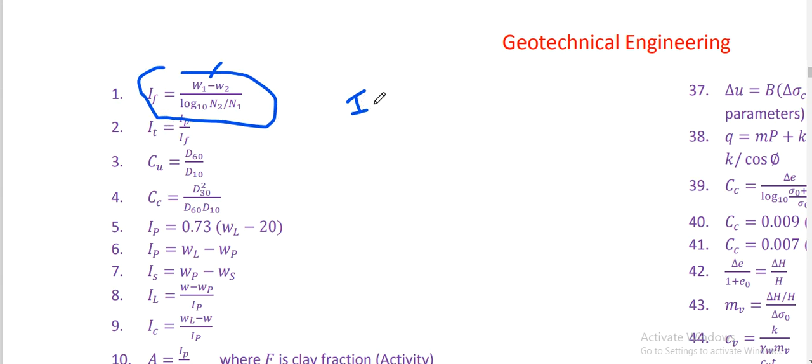Secondly, the toughness index formula IT is IP by IF, where IP is plasticity index and IF is flow index. So toughness index is basically the ratio of plasticity index divided by flow index.

Then what is the coefficient of uniformity? It is D60 by D10. D60 is the size of the sieve where 60% of particles pass through that particular size, and D10 is similarly defined.

Similarly, coefficient of curvature is D30 squared by D60 into D10. So this is formula number 4.

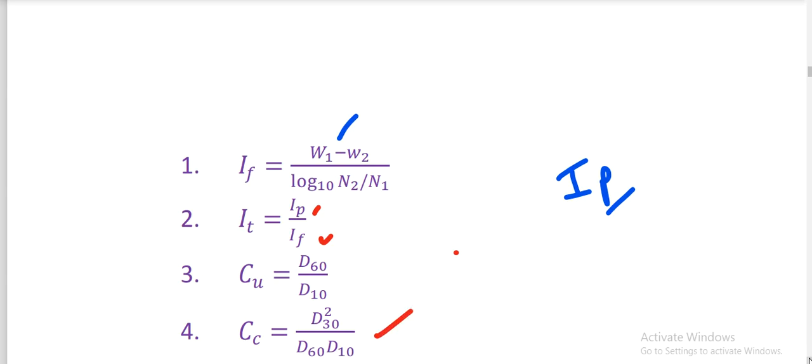Then we'll discuss formula number 5, the plasticity index IP. If you determine it, it is 0.73 times WL minus 20.

Formula number 6: plasticity index is also defined as liquid limit minus plastic limit. Also, shrinkage index is basically plastic limit minus shrinkage limit.

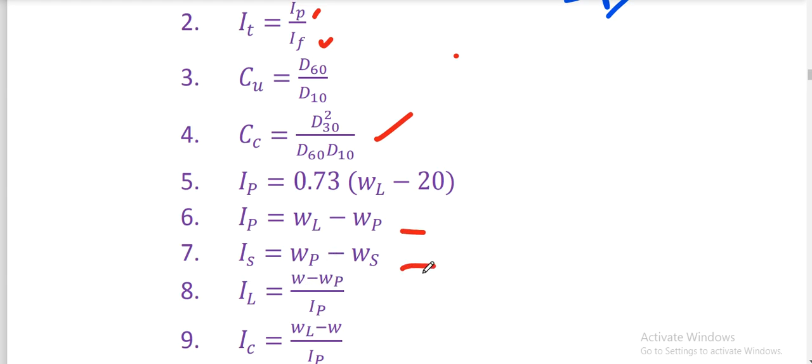Then formula number 8: liquidity index IL is basically W minus WP (plastic limit), divided by IP. This is a formula to determine liquidity index.

Then consistency index IC is WL minus W, divided by IP. Then what is activity? Activity is IP by F, where F is the clay fraction.

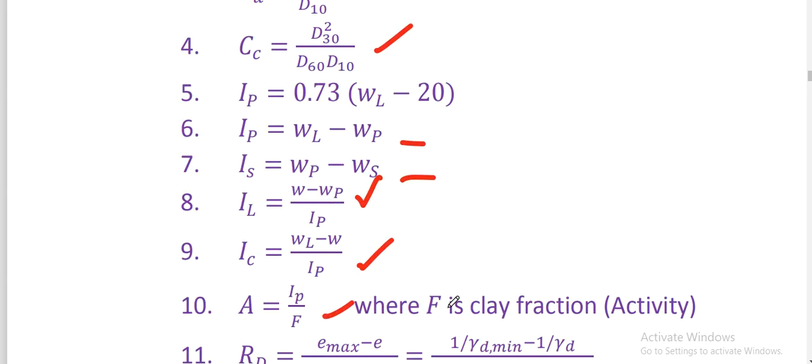What is clay fraction? Clay fraction is particles passing 2 micron size. That means if our particle size is smaller than 2 microns, we consider it as clay fraction.

Then we have relative density. Relative density formula is E maximum minus E, divided by E maximum minus E minimum. From there we can write it as 1 by gamma D minimum, minus 1 by gamma D, divided by 1 by gamma D minimum minus 1 by gamma D maximum, where gamma D is basically the dry density.

Gamma D min is the dry density at the loosest state, and gamma D max is the dry density at the densest state.

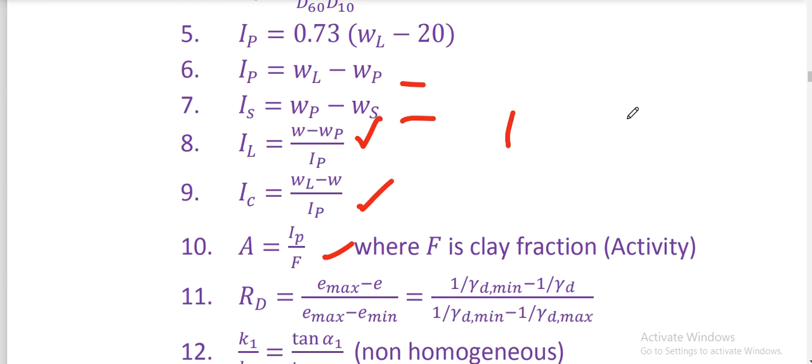Then we have coefficient of permeability formula, formula number 12. That is K1 by K2, where K1 is the coefficient of permeability of the first soil, K2 is coefficient of permeability of the second soil, equal to tan alpha1 divided by tan alpha2, where alpha1 and alpha2 are the angles.

Suppose we have two soil layers, so the first has permeability K1 and the second soil has permeability K2. If you draw the angles, this angle is basically alpha.

Then another formula for coefficient of permeability is based on void ratio. Coefficient of permeability varies with the square of D (particle size) and with porosity, roughly as E cube or E square — you can say K is proportional to E square. So permeability is proportional to the square of the void ratio. These types of questions are framed from this Allen-Hazen equation.

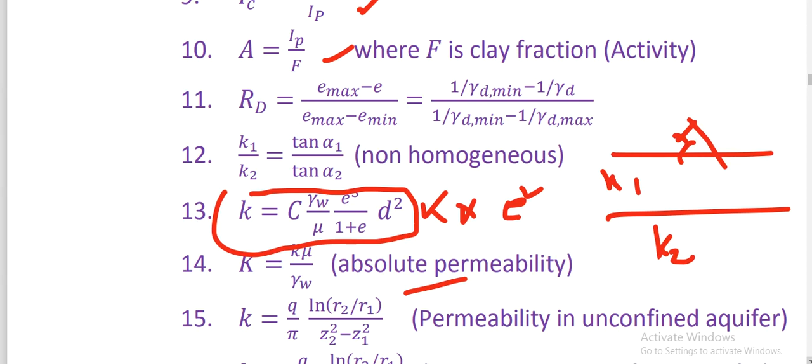Then we have K is equal to K mu by gamma W, that is absolute permeability. Then for unconfined aquifer, the permeability value is determined by Q by pi ln R2 by R1, Z2 square minus Z1 square.

Then for permeability in a confined aquifer, K is equal to Q by 2 pi B ln R2 by R1, Z2 minus Z1. Then if we need to find horizontal permeability KH, that is equivalent horizontal permeability, it is K1 into H1 plus K2 into H2 by H1 plus H2.

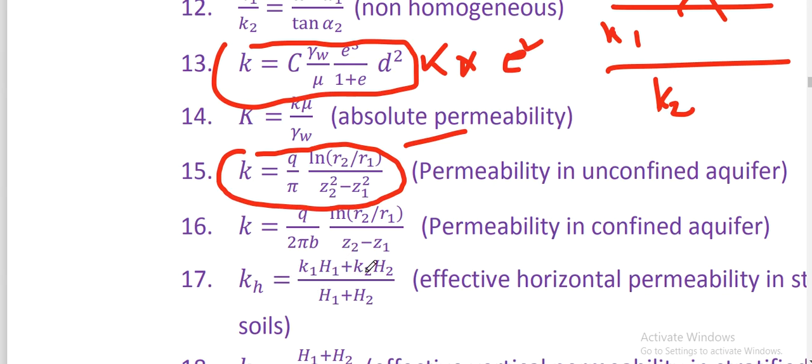Next we have the formula for KV. KV is basically the effective vertical permeability for a stratified soil. If vertical permeability is to be found, then it is H1 plus H2 divided by H1 by K1 plus H2 by K2.

Sometimes you may be asked to find the effective permeability, where KH and KV are given. Suppose KH value is given as 6 and KV value is also given as 6, then root over of 36, K equivalent is also 6. So such type of questions may arise.

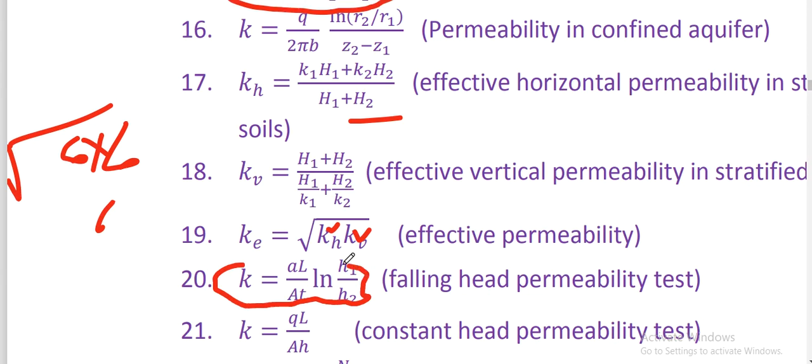Then for falling head permeability, how do we find permeability? K is equal to AL by AT ln H1 by H2. Then formula number 21 for constant head permeability is Q L by A H.

What is the seepage discharge formula? Q is equal to K H NF by ND.

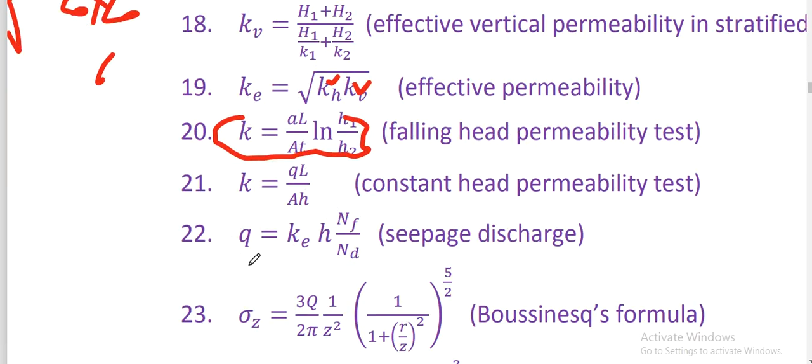What is Boussinesq's formula for determining the vertical stress at a point Z? 3Q by 2 pi Z square, 1 plus R by Z square, to the power 5 by 2.

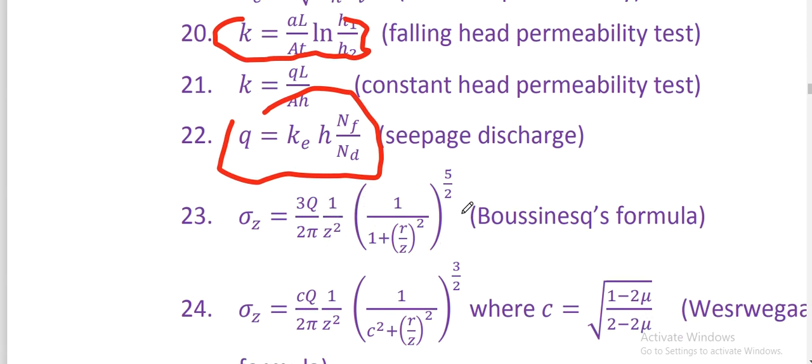Then we have Westergaard's equation for finding sigma Z value: CQ by 2 pi Z square, C square plus R by Z whole square, to the power 3 by 2. Then for line load we have 2Q by pi Z, 1 plus X by Z square, whole square.

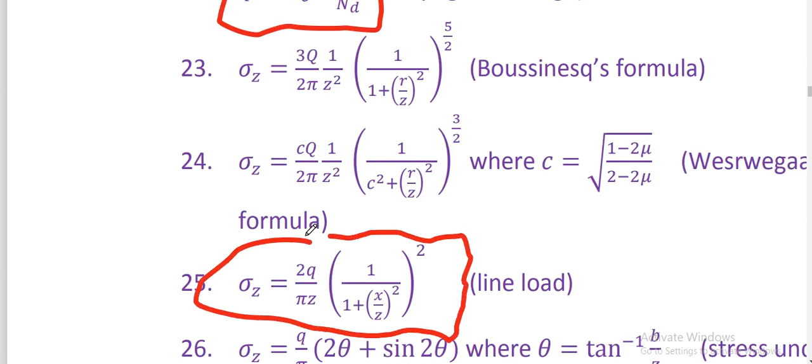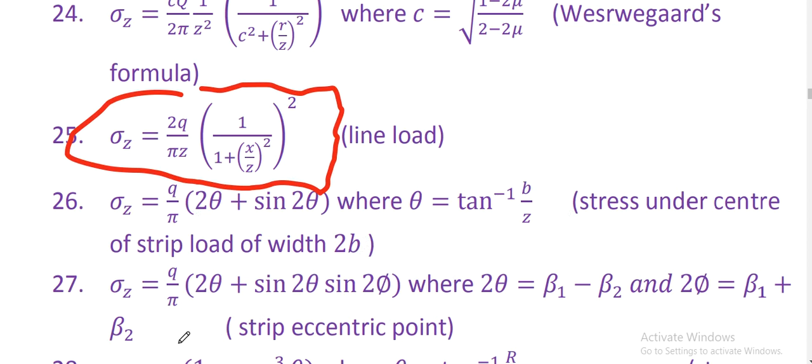Then we have formula number 26, for stress under the center of a strip load. For strip load, sigma z is equal to q by pi into 2 theta plus sin 2 theta, where theta is tan inverse b by z. Sigma z is equal to q by pi into 2 theta plus sin 2 theta sin 2 phi, where 2 theta is beta 1 minus beta 2, and 2 phi is beta 1 plus beta 2, for strip eccentric point load.

Okay, then we can determine the circular load stress, vertical stress at point z: Q into 1 minus cos cube theta, where theta is tan inverse r by z.

Sin phi can be written as sigma 1 minus sigma 3 divided by sigma 1 plus sigma 3, for cohesionless soil. For cohesive soil, sin phi is sigma 1 minus sigma 3 by 2, by c cot phi plus sigma 1 plus sigma 3, divided by 2.

Then we have the major stress sigma 1 equals 2c tan alpha plus sigma 3 tan square alpha, where the failure plane or failure angle is 45 plus phi by 2. Tan phi is tau by sigma for shear box test.

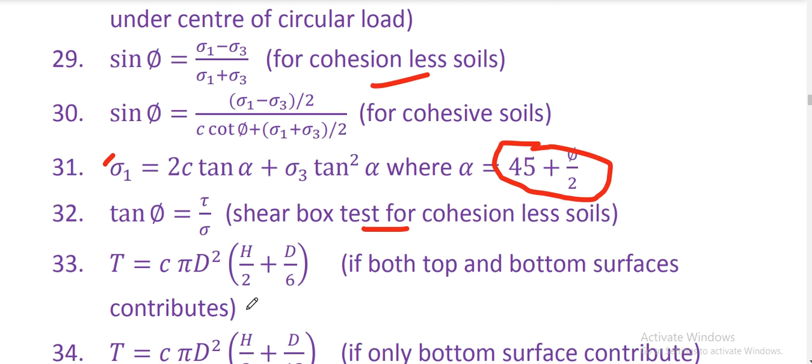And then another formula for shear test, we can write torsion T equal to c pi d square h by 2, d by 6. If only the bottom surface contributes, then it is c pi d square h by 2, d by 12.

Then for immediate settlement, the formula is Si equal to qb into 1 minus mu square by E, into If, where If is the influence factor.

Then for settlement of footing based on the plate load test, how do we determine settlement? Sf is equal to Sp into Bf by Bp, where Bf is the width of the footing, Bp is the width of the plate, and Bp plus 0.3, Bf plus 0.3 — one is the width of the prototype and another is the width of the plate.

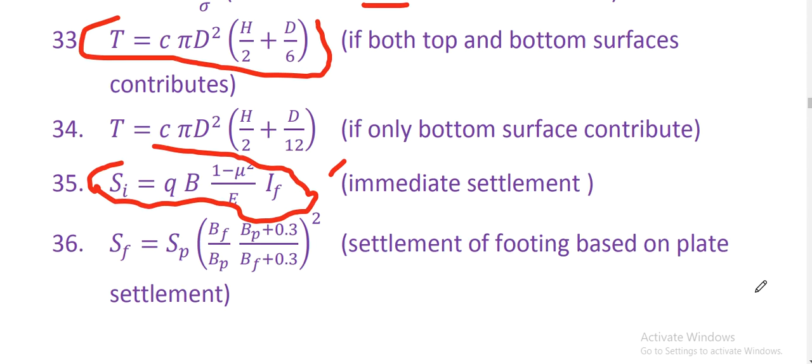Right, so these are the 36 formulas. Then we'll move to formula 37. Today we'll discuss all the formulas regarding geotechnical engineering, and I'll continue this formula set series.

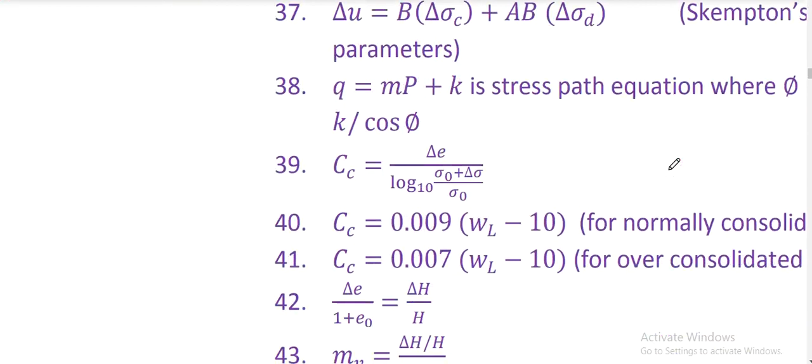So formula number 37 is Skempton's formula: pore pressure value is equal to B into delta sigma c plus A B into delta sigma d.

Then what is the equation for stress path? Stress path equation is q is equal to mp plus k. What is the coefficient of curvature? That is del e by log 10 of sigma naught plus del sigma by sigma naught.

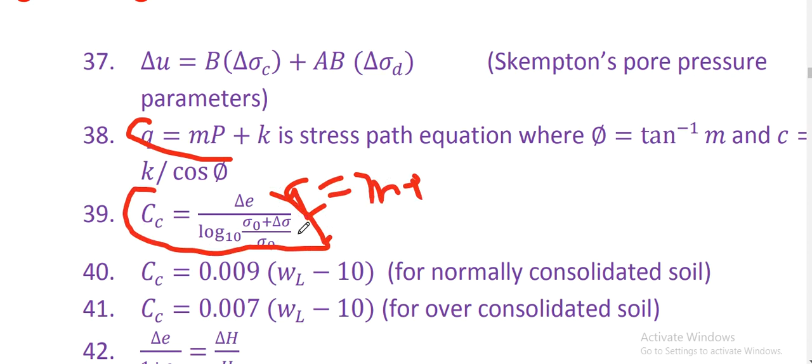What is the Cc value, coefficient of compression, for normally consolidated soil? For NC soil it is 0.009 into wl minus 10, and for over consolidated soil Cc is 0.007 into wl minus 10.

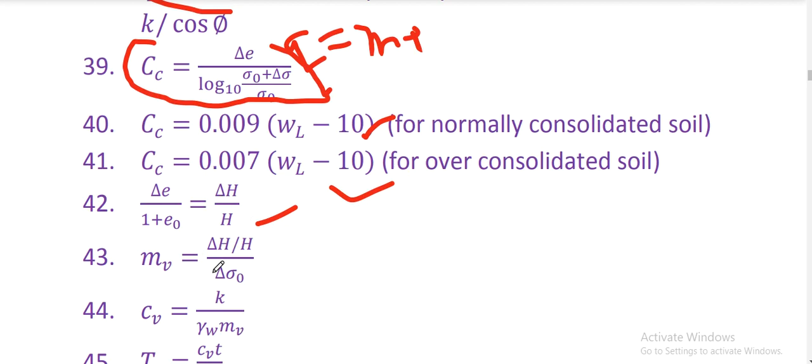What is the void ratio? Del e by 1 plus e naught is del h by h. It's the relation between settlement or degree of consolidation with respect to the void ratio. Then mv is del h by h del sigma naught.

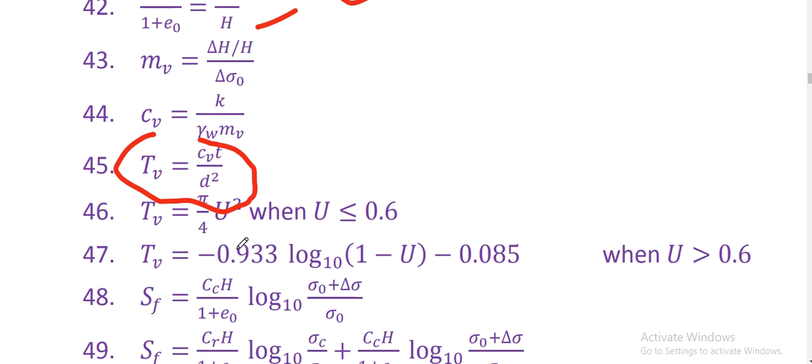mv is the volume compressibility. cv is basically k by gamma w mv, and Tv, the time factor, is given as cv t by d square. Tv is equal to pi by 4 u square when u is less than 0.6, and Tv is equal to minus 0.933 log 10 of 1 minus u minus 0.085 when u is greater than 0.6.

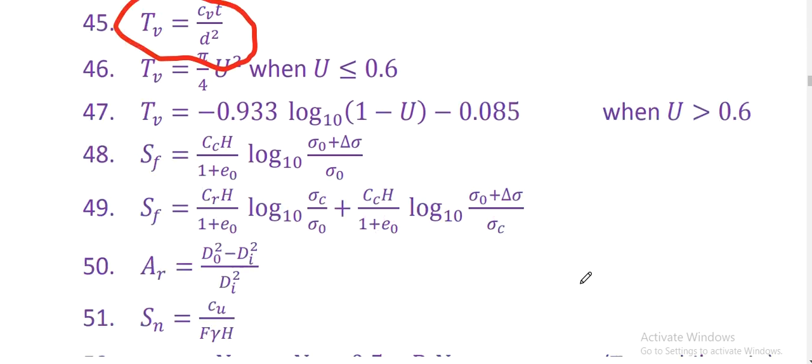Then what is the settlement? Final settlement can be given as cc H over 1 plus e naught, log 10 of sigma naught plus del sigma by sigma naught. Similarly, settlement can also be calculated with reference to the recompression curve and the compression curve, then we'll have two terms - one for recompression, one for compression.

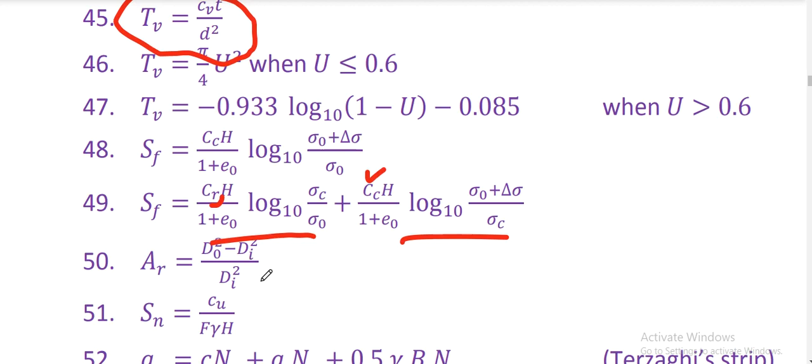What is the area ratio? Area ratio is d0 square minus di square by di square, very very important. Then we have the Taylor stability number, cu by f gamma H - this is also very very important.

Then what is the Terzaghi formula? That is the ultimate bearing capacity of the soil. How to determine it: C Nc plus Q Nq plus 0.5 gamma B N gamma, where Nq, N gamma, Nc are the bearing capacity factors. C is the cohesion, Q is the surcharge, gamma is the unit weight, and B is the width of the footing.

So we can determine the Terzaghi strip footing ultimate bearing capacity. Similarly, if the footing is square, we write 1.3 in place of 1 and 0.4 in place of 0.5. If the footing is circular in shape, we write 1.3 for c and 0.4 in place... 0.3.

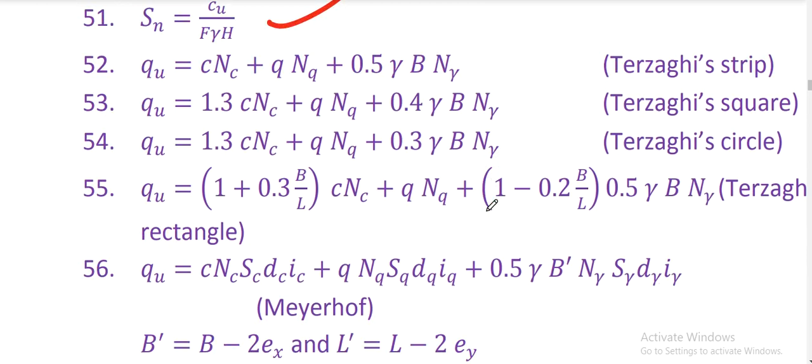For rectangle we can write this formula: 1 plus 0.3 b by l, times C Nc, plus q Nq, plus 1 minus 0.2 b by l, times 0.5 gamma b N gamma.

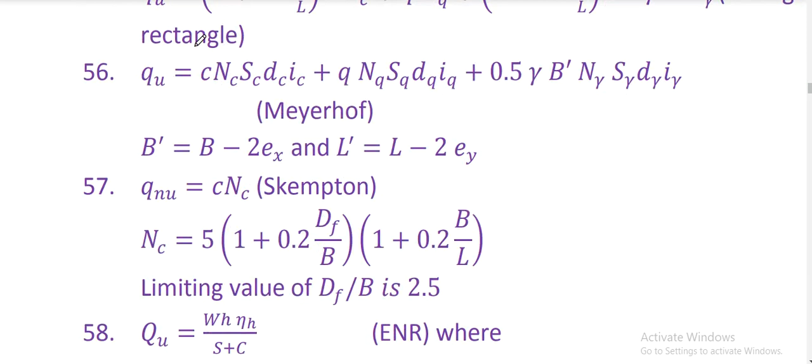Then according to Meyerhof's equation, we have a long formula: Qu is equal to C Nc Sc Dc Ic - these are all factors, several factors. Then this is for eccentric loading. If you encounter an eccentric load, then B' is B minus 2ex, and L' will be L minus 2ey.

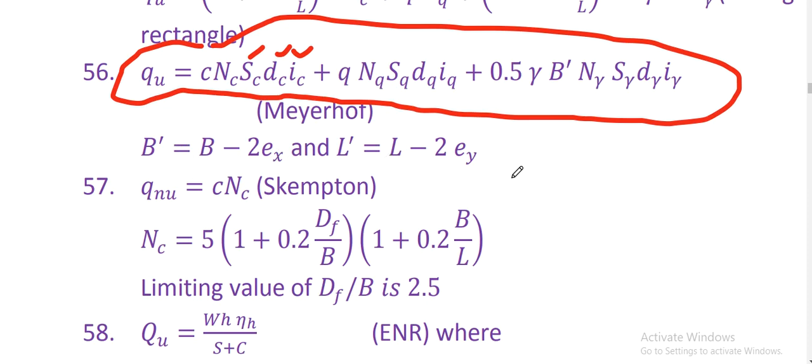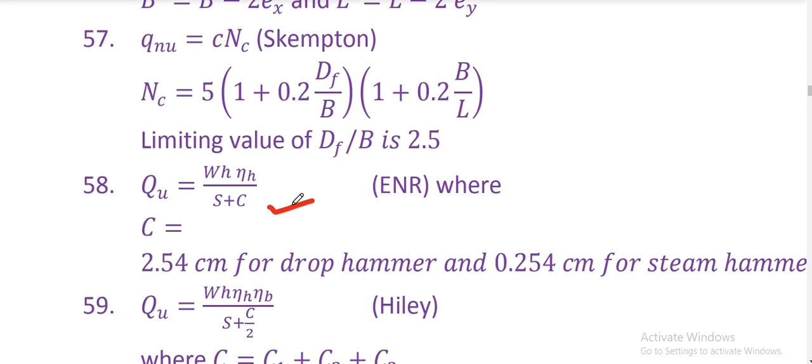Then Skempton's formula is Qnu is C Nc. Then we have Qu, that is the Engineering News formula. Engineering News formula is W h eta h over S plus C. The C value is 2.54 centimeters for drop hammer and 0.254 centimeters for steam hammer.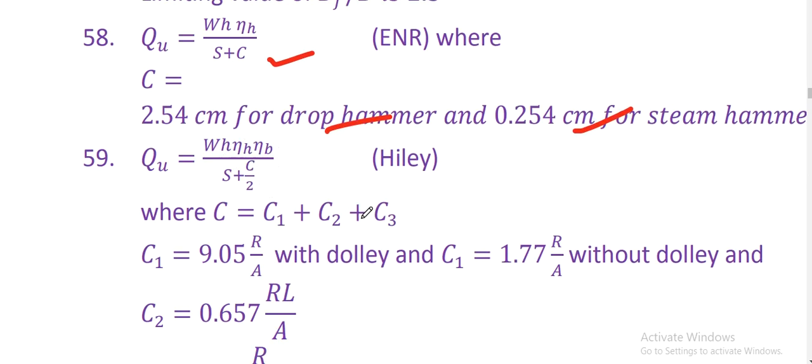Then we have Qu, ultimate load for pile group - this is the formula. Qu is equal to Ap C Nc plus As lambda sigma plus 2C for clay. For sand, it becomes Ap sigma Nq As sigma K tan delta.

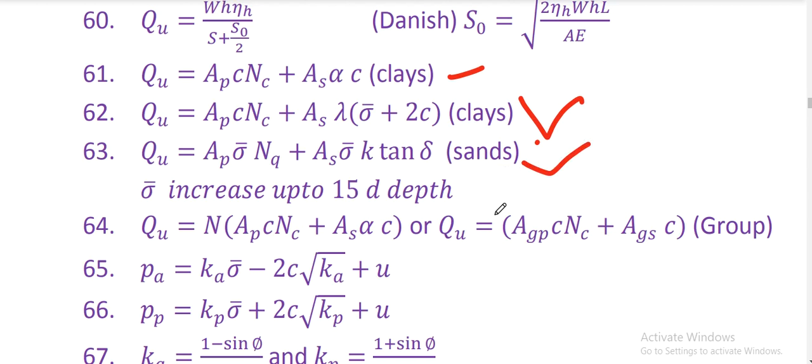Then coming to the earth pressure chapter. In earth pressure pile group, the formula is Agp C Nc, Ags plus C. Then for active earth pressure, the formula is K sigma' minus 2C root K plus u.

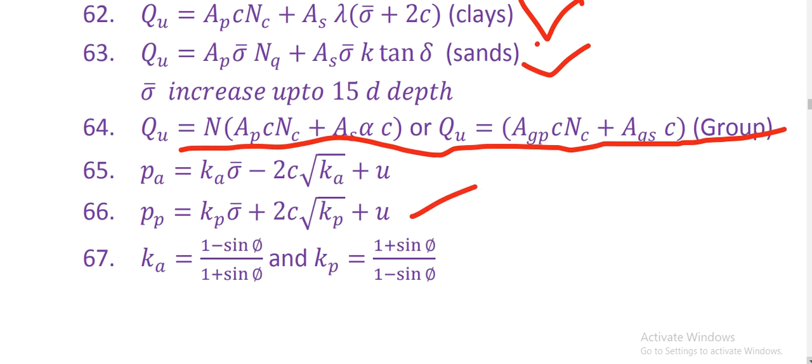And for passive earth pressure, Kp sigma' plus 2C root Kp plus u. This is for cohesion - when cohesion exists in the soil. This is the active earth pressure formula, very very important: K equals 1 minus sin phi divided by 1 plus sin phi. Kp formula is 1 plus sin phi divided by 1 minus sin phi.

Then if the slope is inclined at certain angles, we use this formula: cos beta, cos square beta, cos square phi, cos beta - and where P active earth pressure is given by this. If it is an inclined backfill, for passive pressure we just reverse the sense of the sign.

Where there is a minus, it will become plus. Where there is a minus, it will become plus. It is plus, hence it becomes minus.

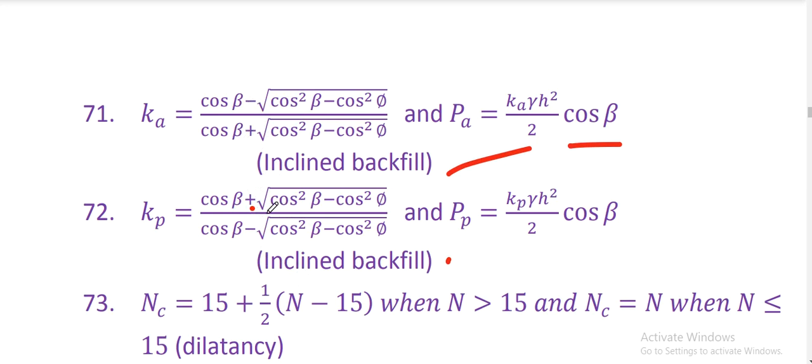So next we have the SPT test. From SPT we can find the dilatancy correction: 15 plus half of n minus 15, for quicksand conditions - very very important. Ic is equal to G minus 1 over 1 plus e.

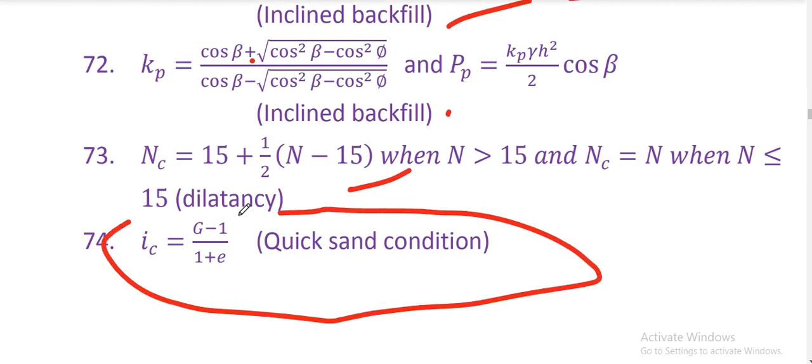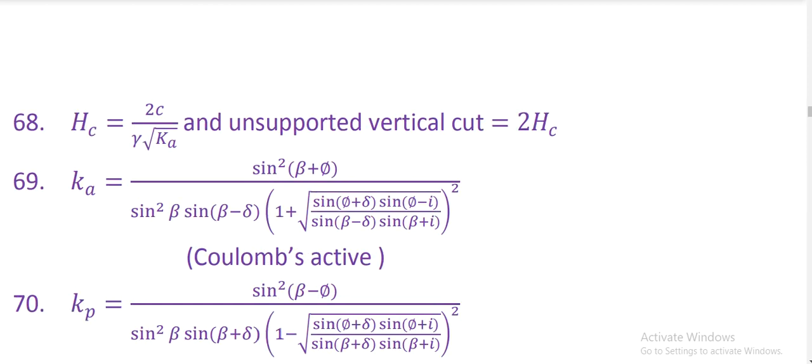So these all 74 formulas are very very important in case of geotechnical engineering. In the next video we'll discuss the important formulas of fluid mechanics. Thank you for watching.